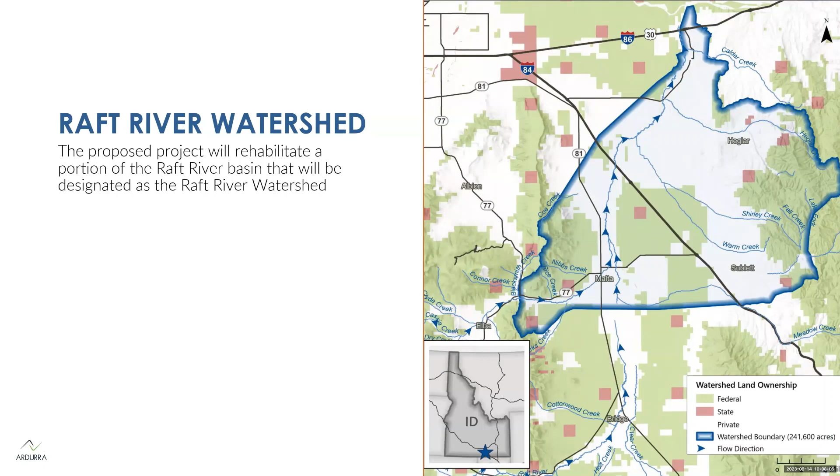It is approximately 242,000 acres. It's developed by combining different hydrologic units as part of the NRCS process. The reason why the project was selected through the USDA NRCS PL 83-566 project is because it is comprehensive. It's addressing flooding, water quality, and declining groundwater levels within the basin.

I've highlighted here the Raft River tributary basin and its relationship to the Eastern Snake Plain Aquifer in the picture to the right.

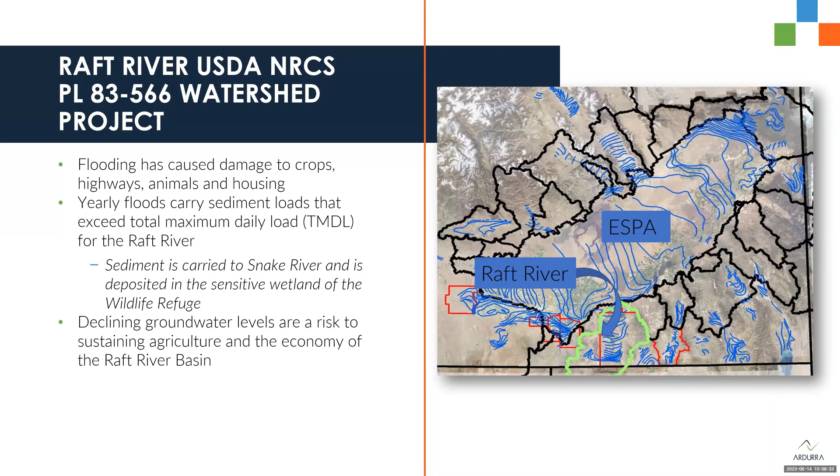Overall, the Raft River Watershed Project would provide flood protection for the Raft River Basin. It provides recharge to a designated critical groundwater area aquifer. It also provides a sustainable source of irrigation for agricultural producers and improves water quality in the Raft River before it flows into the Snake River.

The picture to the right shows the proposed project locations from the environmental assessment, which is being completed by J-U-B Engineers. The pipeline route is the pink line coming up the basin. Bank stabilization is in red, and flood detention basins are also marked on the map. Overall, it's a comprehensive watershed restoration project that addresses many different aspects affecting the Raft River Basin.

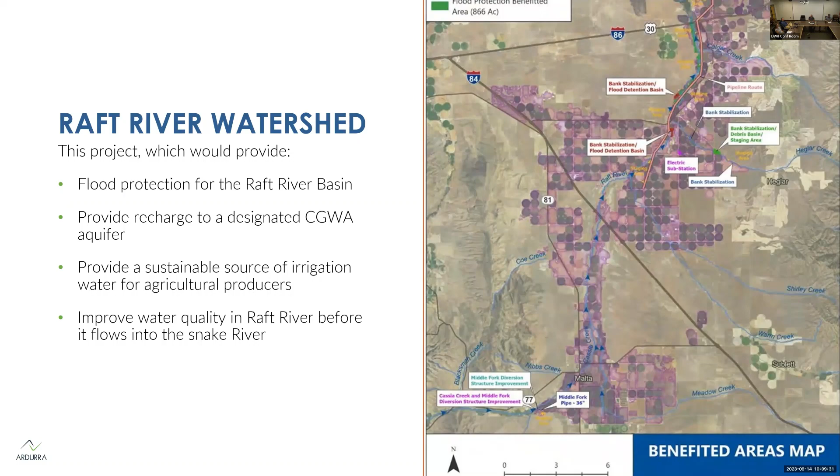A little more detailed information about the project: it would install a pump station and pipeline from the Snake River to the Raft River Basin to deliver private water right permit for recharge. It also develops flood detention and recharge ponds adjacent to the pipeline and Raft River to remove sediment and pollutants and reduce flood flows, but also provide for recharge from the Snake River.

There are bank restoration projects along the tributaries of the Raft River, including Hegler Creek, because they are very high sediment producing rivers. And then the pipeline will enable soft conversion of groundwater acres to surface water for irrigation.

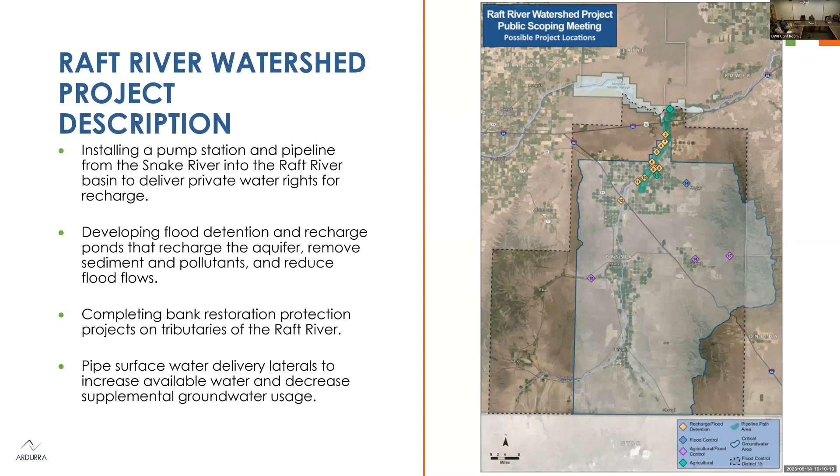The Raft River Flood District has made this project a priority because of recent flooding in 2017. I think we all remember when the water overtopped the freeway, preventing travel from Burley to Pocatello without detouring through Utah. That flood was extensive and caused loss of both crops and livestock.

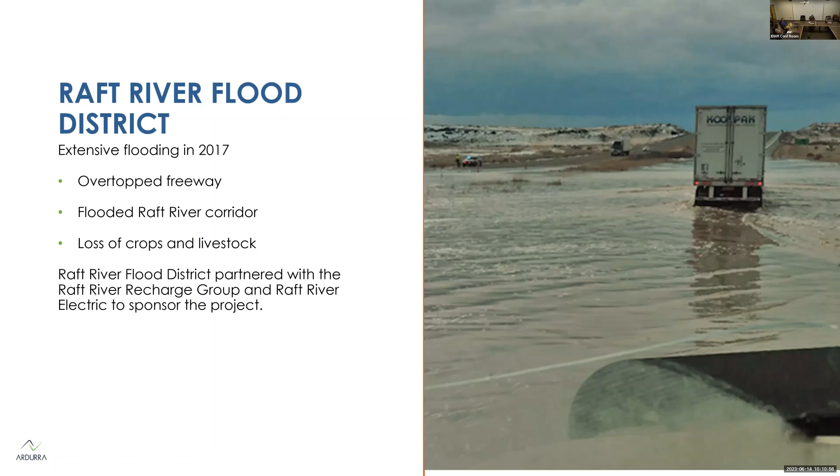As a result of that flood, the Raft River Flood District partnered with the Raft River Recharge Group and Raft River Electric to sponsor the project for funding through the USDA NRCS program.

Raft River Electric is a partner in the project because the continued groundwater declines necessitate more power each year to serve groundwater pumpers in the area. Their part of the project is a substation upgrade that will provide the necessary power for the pump station.

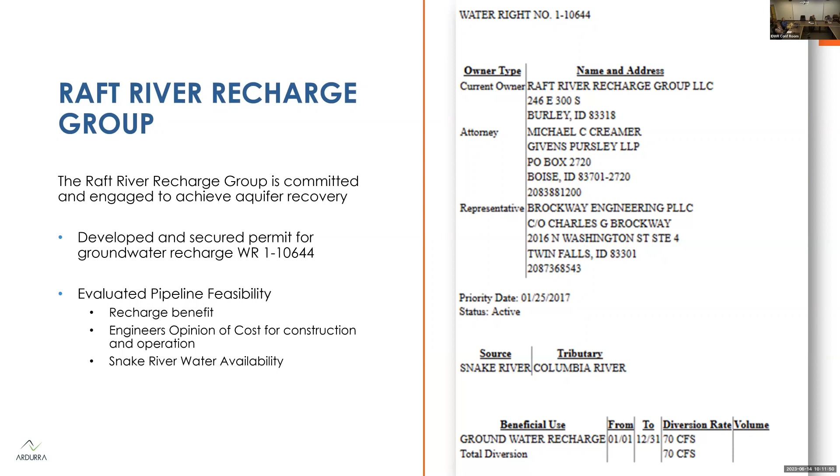The Raft River Recharge Group is really the driving force behind this project. They are cohesive, they're committed, they have been very proactive in their efforts for funding and development of this groundwater recharge permit. Overall, they're the leaders of the group and have been key to getting this project moving forward.

The Raft River Groundwater District is also an essential partner, although they're not partners within the watershed rehabilitation project. But Ryan Moss is also the chairman of the Groundwater District, and they recognize that the pipeline project will be critical to sustain irrigation in the valley.

They work with well water consultants and do continued analysis to evaluate the impacts of current recharge projects, which they have tested quite a few recharge facilities adjacent to the Raft River already and use them yearly, and also track groundwater usage in the valley for the basin.

Ryan, do you have anything to add?

I would just like to say that, as chairman of the groundwater district, we've looked at all options to try to manage our aquifer and make it come back into stability. And there's limited resources inside the basin, so we've looked to outside the basin to try to bring some water in to help with this effort that we're moving forward with, and this pipeline is a big factor in that.

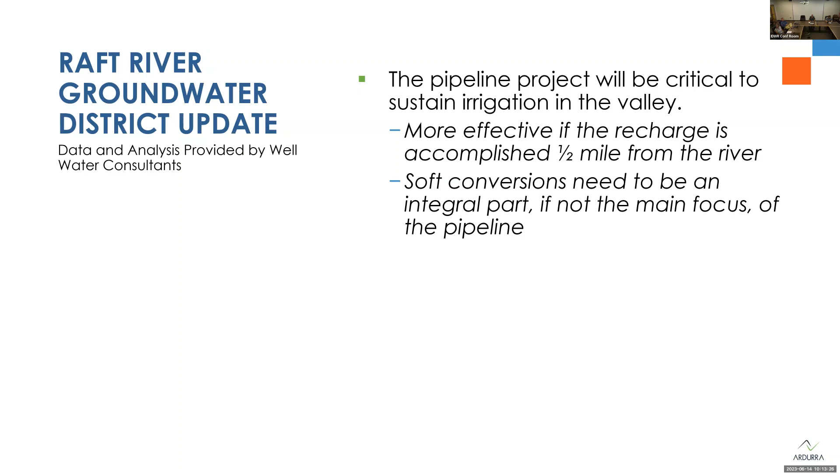All right, well, thank you for that, Ryan. So now I'll talk more specifically about the Raft River Basin and why this project is so critical.

The Raft River Basin is a really productive agricultural region and has an extensive dairy industry and agricultural industry within the valley. The population is pretty small, but that's also what makes it such a great resource, because it's highly productive and has lots of land for agriculture.

So first I'll start with the Raft River. The Raft River was previously a perennial stream before development in the Raft River occurred. The Raft River was first used for irrigation as a surface water source for a small amount of acres in the Raft River. Over time, as groundwater levels have declined, the river has become intermittent and subterranean in the northern part of the basin.

And because it is intermittent, the vegetation and riparian habitat along the Raft River corridor has been eliminated, which creates a condition where when the Raft River does flow, it becomes a very high sediment load carrying river, which then pollutes the mouth of the Raft River, or the confluence of the Raft River with the Snake River at Lake Walcott.

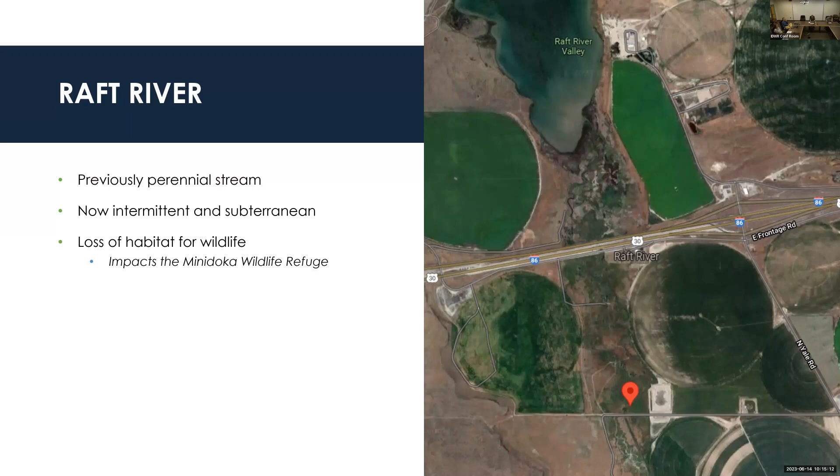So the Raft River Aquifer is a larger tributary to the Eastern Snake Plain Aquifer. It was designated as a critical groundwater area in 1963. The original investigation on groundwater conditions as of 1966 was published by Walker et al.

In 1970. And recently, the Idaho Water Resources Board made the area a priority, and the Department of Water Resources and USGS are part of a larger groundwater modeling effort to evaluate the current groundwater conditions for Raft River, including a hydrologic characterization, which is underway. This is essential work. The hydrologic characterization is the first step in groundwater modeling efforts and will be really important to all stakeholders in the Raft River Basin and the understanding of the interaction between the Raft River and the Eastern Snake Plain Aquifer.

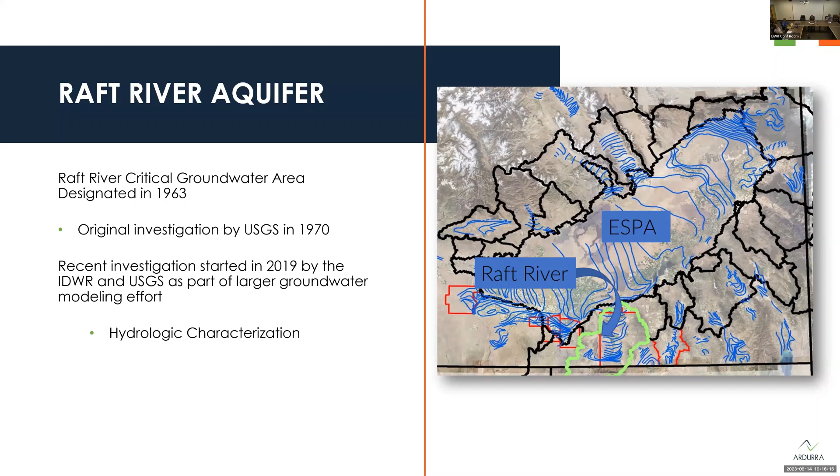So this is a picture showing the boundary of the Raft River hydrologic basin. That's in green. The red line is the critical groundwater area for the Raft River area. We can see that the two boundaries do not match, which means that water rights are administered differently within that boundary, even though the larger boundary is what is determining water availability and recharge for the Raft River Aquifer. Those areas were removed from the critical groundwater area through petitions in 1966, 1970, and 1977, respectively.

Another key element of the critical groundwater area is that additional development was not allowed to occur past the designation in 1963. So as farmers became more efficient with their water application and converted to sprinkler systems, they developed what were called expansion acres, which were designated by the legislature. Those expansion acres had special conditions that restricted their existence and required that annual withdrawals within the aquifer must equal annual recharge in order for the expansion acres to be viable.

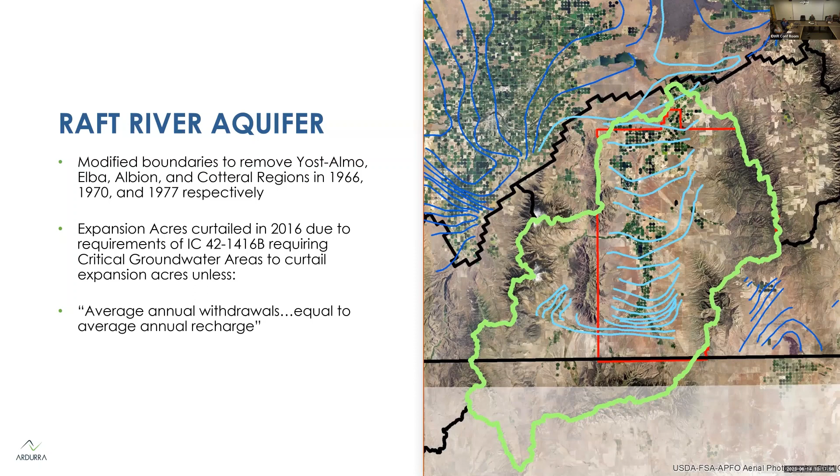So in 2016, that was not demonstrated, and those acres were curtailed between 2016 and 2019 in the basin. The critical groundwater area expansion acres were curtailed, and that was a significant impact to the region. It also is very restrictive. It does not allow for mitigation, and it doesn't take into account any efficiency improvements or cropping practices that the farmers may have implemented.

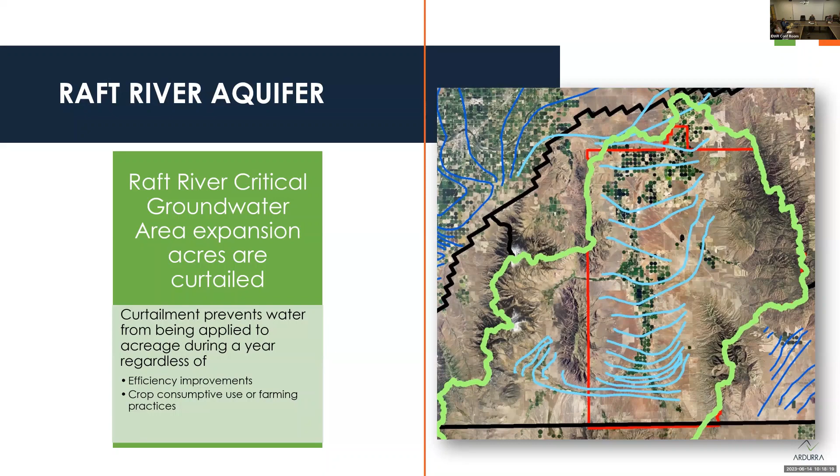We all understand that curtailment is a huge economic impact to the region. Approximately 7,800 acres of water rights were curtailed over a 3-year period. And the overall impact is that it reduced the value of that land to 10% of its previous value.

The Raft River Aquifer has a very dual element to it. The northern basin has seen more significant groundwater declines. It's also the more productive area of the aquifer and deeper. The southern basin has less significant declines. The aquifer recharges more readily because it's closer to the water supply in those areas.

The total aquifer deficit is unknown at this point, although the current hydrologic characterization will help address that. The last estimate was 103,000 acre feet, and that was estimated in 1966. And the majority of that value was because of underflow from the Raft River into the Eastern Snake Plain Aquifer that was considered lost to the basin.

However, in that 1970 report, it was noted that when groundwater levels declined 150 feet or more along Township Range 11 South, it would be expected that the groundwater would be salvaged from the outflow. And I don't know if you can see my cursor, but this 11 South line is right here along this boundary. And at that boundary, those groundwater levels have exceeded 150 feet of decline. And so it is anticipated that the current research will be finding that a portion of the groundwater outflow is being salvaged for groundwater use within the basin.

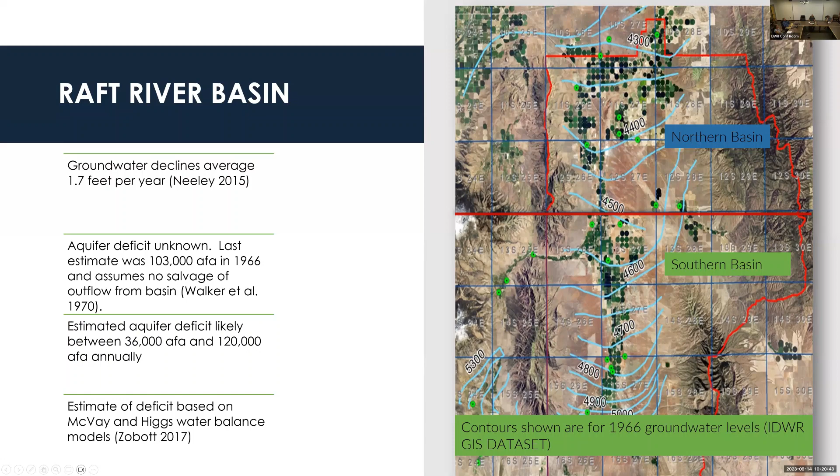So just a little more on the aquifer difference between the northern and southern portion of the basin. So the southern portion of the basin is the gray line, and we can see that the declines are much lower. It's actually a little bit less than 1 foot a year on average, whereas the northern basin has a steeper decline and is consistently losing approximately 2.3 feet per year.

So the impacts of groundwater declines are more severe for the northern basin, and that's why the Raft River Recharge Group has been so proactive, because they are the bottom of the basin and experience amplification of all the impacts upstream on their operations and groundwater pumping.

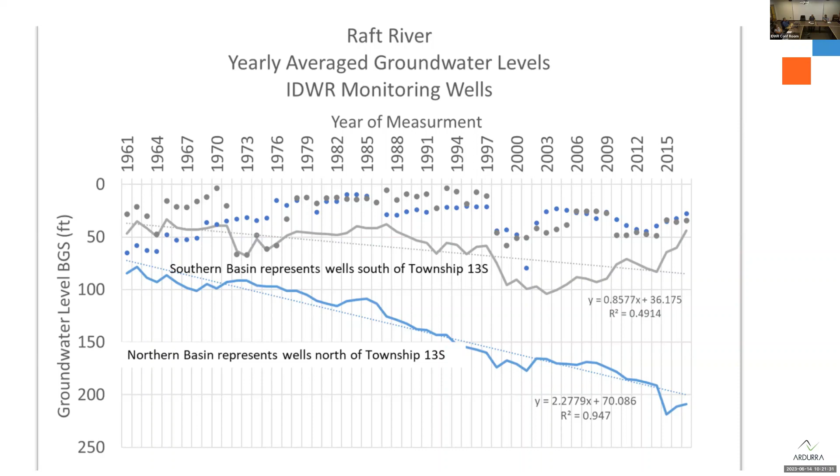Groundwater recharge was evaluated within the Raft River feasibility study completed by Brockway in 2015, and it is anticipated that groundwater recharge will significantly benefit the northern portion of the basin. Those yellow circles are approximately the recharge locations modeled with the simplified groundwater model at the time of the feasibility study, and the contours show how the water would mound within that area as a result of recharge at those locations.

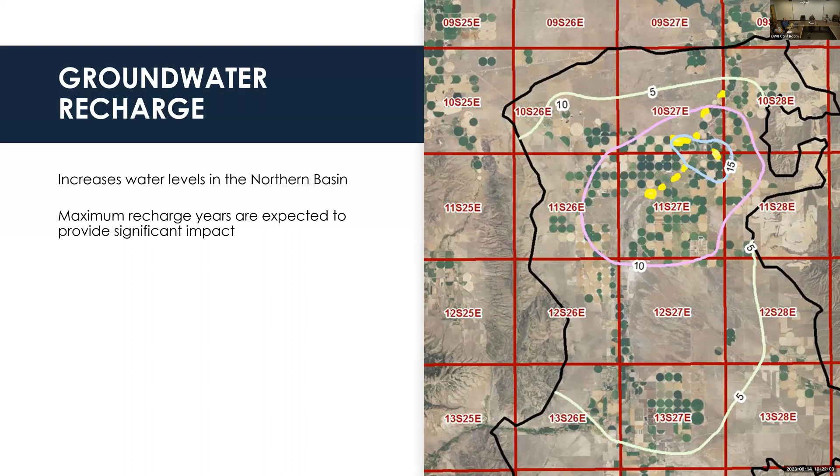Overall, the Raft River Recharge Group and partners proposed to build a pipeline to divert water from the Snake River to reduce groundwater declines, improve access, provide opportunity for soft conversion, and prevent future curtailment.

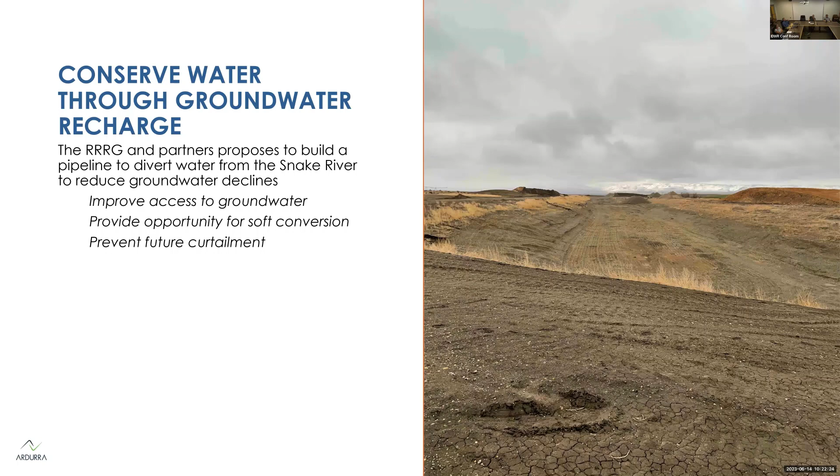In summary, the Raft River Watershed Plan includes projects to construct a pump station and suction lines at the Snake River that connect with a 13-mile long pipeline extending north to south to deliver approximately 100 CFS of water, including 70 CFS of recharge water, with opportunity to provide soft conversion water on top of that capacity. There would also be flood control and recharge basins along the Raft River floodplain to provide 620 acre-feet of detention and recharge within those basins.

The plan also includes constructing debris basins along Heglar Creek to control for flood and sediment, constructing a substation to support the project, and improving existing diversions to flood channels along Raft River, Cassia Creek, and the Middle Fork of Cassia Creek. Finally, there would be bank stabilization and restoration along Heglar Creek to reduce sediment load during flood events.

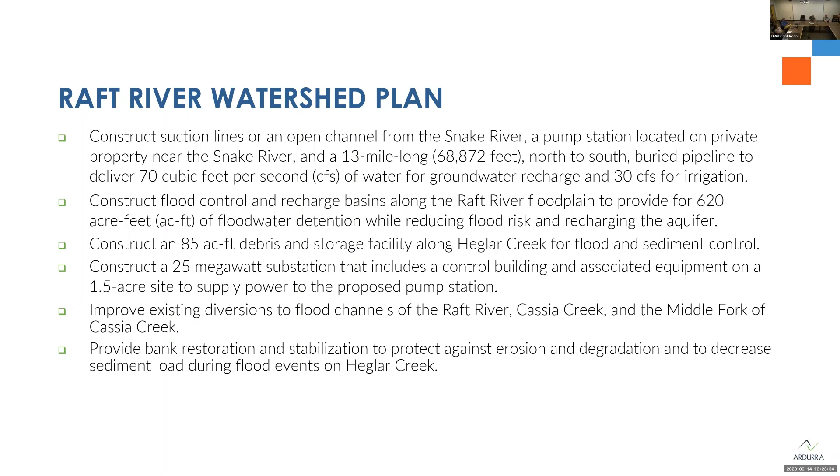The recharge locations are within the water right permit and would be within the locations shown in blue on the map, so there's a place of use for the recharge. Recharge would then be rotated around the northern portion of the basin to evenly distribute the benefits for the area.

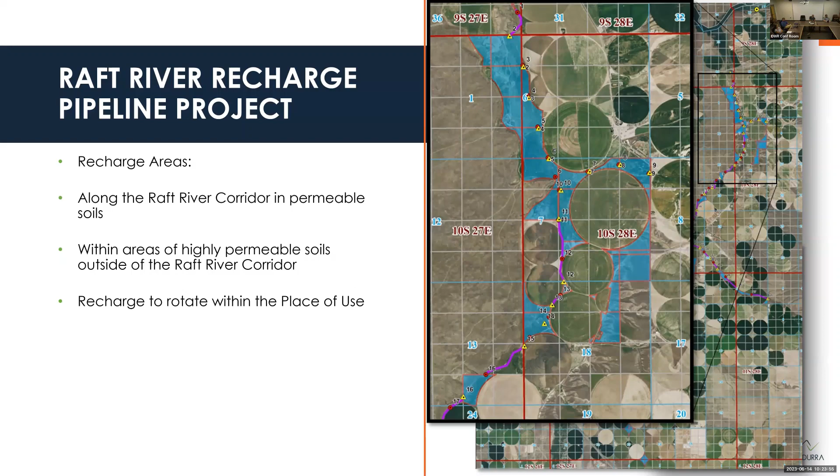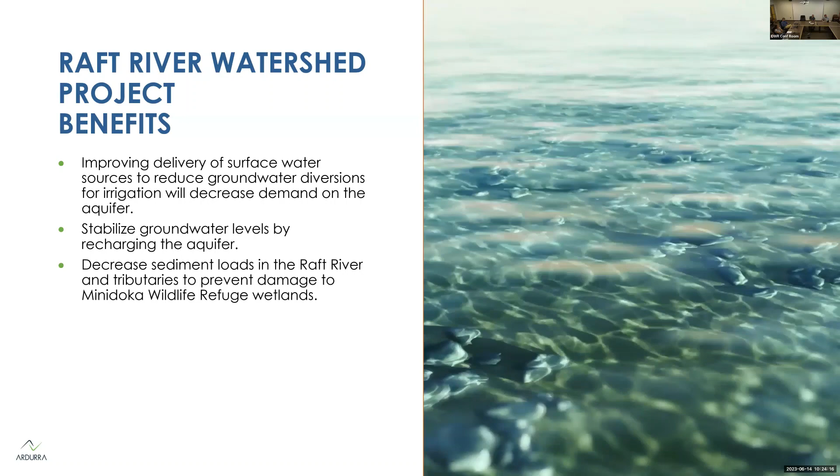So in summary, the benefits of the project are to provide for delivery of surface water to reduce groundwater diversions, stabilize groundwater levels by recharging the aquifer directly, and improve water quality by decreasing sediment loads in the Raft River and tributaries to prevent damage to the Minidoka Wildlife Refuge.

So I just wanted to go through the funding that the project has secured to date.

The main source of funding for the project is through a very unique program called the USDA NRCS Watershed Protection and Flood Prevention Program, PL 83-566. There are three phases to this program: the first phase is environmental, the second phase is design, and the third phase is construction.

The match for the first two phases is 100%, so the NRCS pays for all of the environmental assessment and the design of the project. An environmental assessment is required because of the extent of the project and because it does not fall under existing programmatic exemptions that the NRCS has.

The design can start once the NRCS National Office has provided programmatic approval of the project, which we expect to happen within the next 3 to 4 months. Construction can then start once design has been approved at the 90% level by NRCS.

The program will fund up to $25 million in construction for the project. At that level, it would require $6.25 million in match for the agricultural projects, or 25%. The project is sponsored by the Raft River Flood District, and co-sponsored by the Raft River Recharge Group and Raft River Electric.

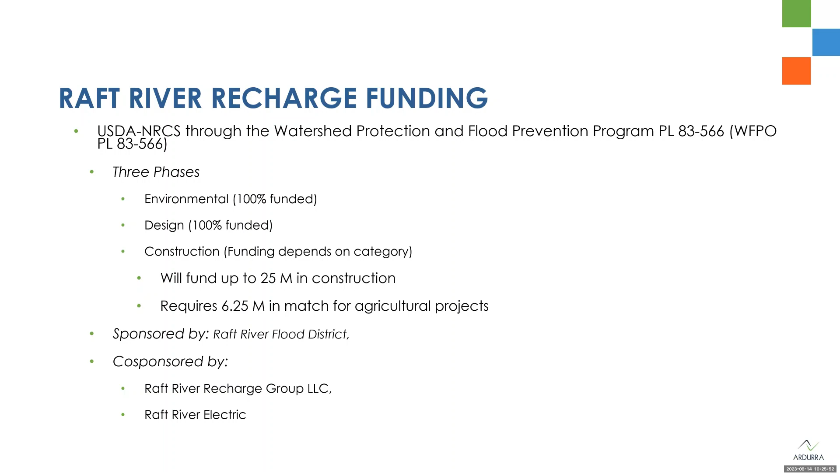The Raft River Recharge Group also pursued a loan through the Idaho Water Resources Board Water Projects Loan Program. They requested a 20-year repayment schedule and were provided an interest rate of 4.75%. The loan of $14.1 million was approved with security to be provided by developing a Raft River Irrigation District entity that would hold and repay the loan.

So overall, the funding for the project: most of it is provided by the NRCS Phase 3 construction phase of the PL 83-566 program. The Phase 2 design was estimated to be about $3.25 million.

The Raft River Recharge Group provides about 13% of the project in cash. The Raft River Electric will provide about 3% in cash match for the substation. The Idaho Water Resources Board loan, which will be through the Raft River Irrigation District, will be about 29% of the project.

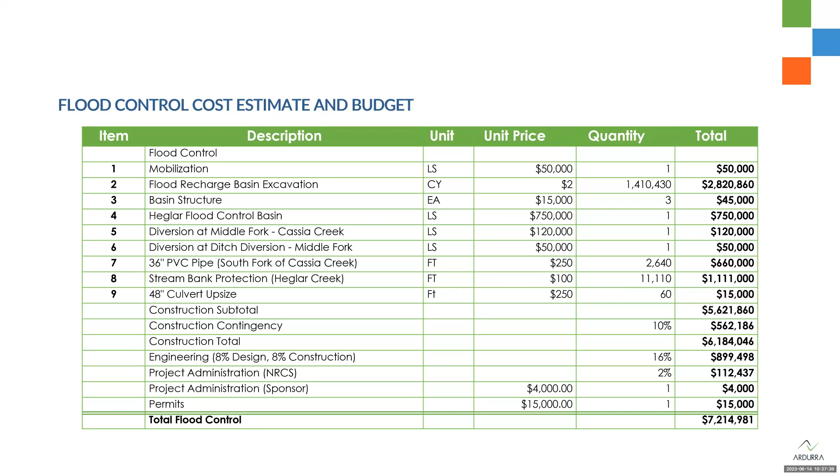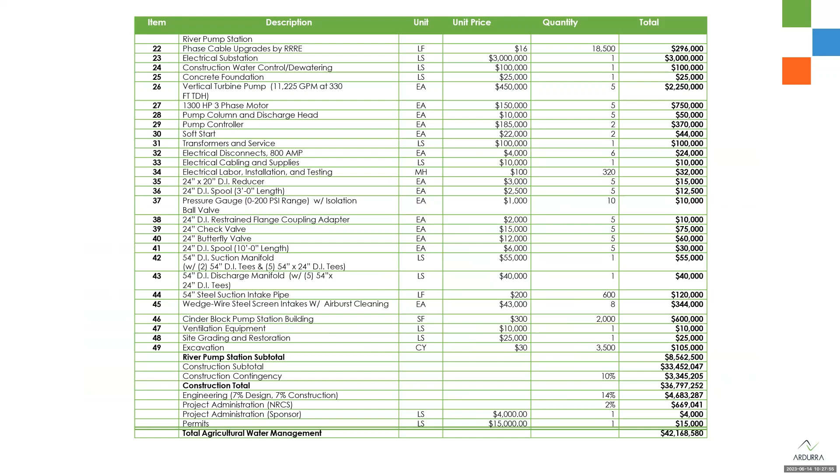The flood control projects and water quality projects are about $7.2 million of the project. The pipeline is about $25 million. The total agricultural portion with the pump station is expected to be $42 million. So overall, the project is about $49 million and some change to complete.

I just wanted to give you a quick update on the Raft River Irrigation District formation. The Raft River Recharge Group hired legal counsel to represent the district and form it. They prepared and submitted the petition to form the district in Cassia County, and there will be a special election in August for the district formation.

The Raft River Irrigation District formation was a little complicated because some members of the recharge group were outside of the district boundaries. So we developed 7 districts that will be represented by each member in the group, and the total number of acres were limited to 3,000 so that the directors could live outside of the district.

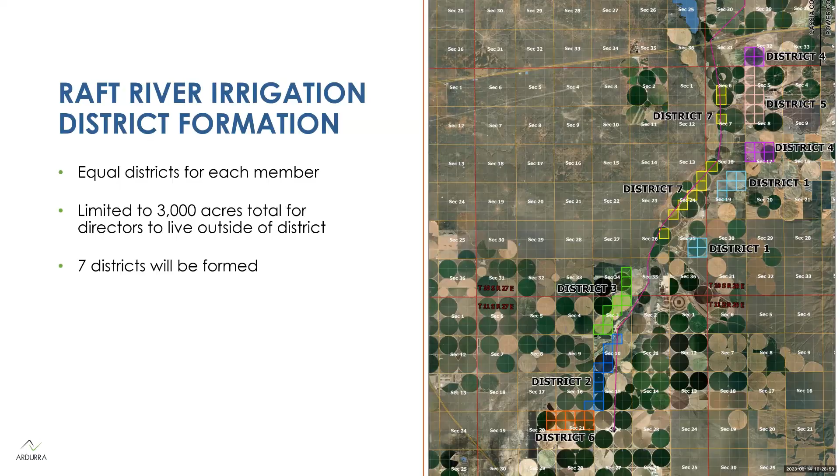Finally, I prepared a project status update. We've talked about this previously, but there's a water right permit for groundwater recharge from the Snake River held by the Raft River Recharge Group. There's been a preliminary environmental review with Bureau of Reclamation and U.S. Fish and Wildlife Service, who are cooperating agencies on the watershed plan EA that will be prepared by NRCS.

The project was selected for funding through the NRCS PL 83-566 watershed program. The loan has been earmarked for the Raft River Irrigation District. They are working with USDA NRCS, Bureau of Reclamation, and U.S. Fish and Wildlife Service to complete the environmental assessment. The draft preliminary plan EA was submitted to the Idaho NRCS state office and is pending submittal to the National Watershed Management Center, which is expected within just a few days.

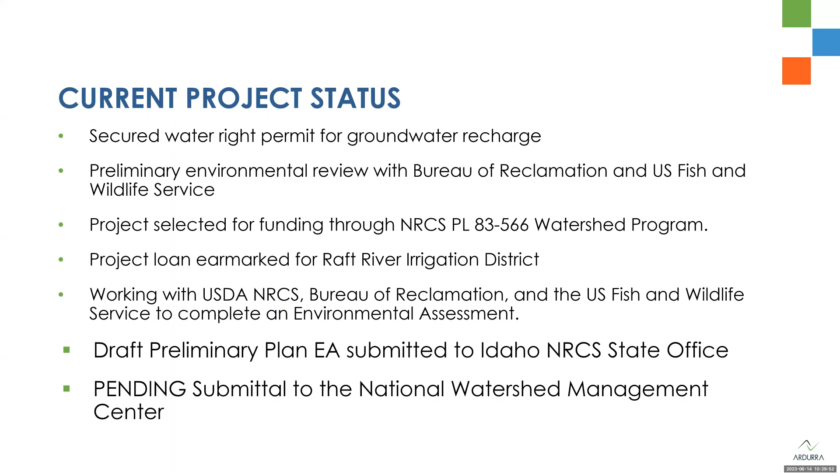In 2024, the design phase can start with programmatic approval of the draft watershed plan environmental assessment, anticipated in November. This is much later than we originally anticipated, and those delays were unforeseen, related to the watershed plan EA approval process at the state and national level. Rules have changed since the last submittal, so there were some delays that weren't anticipated.

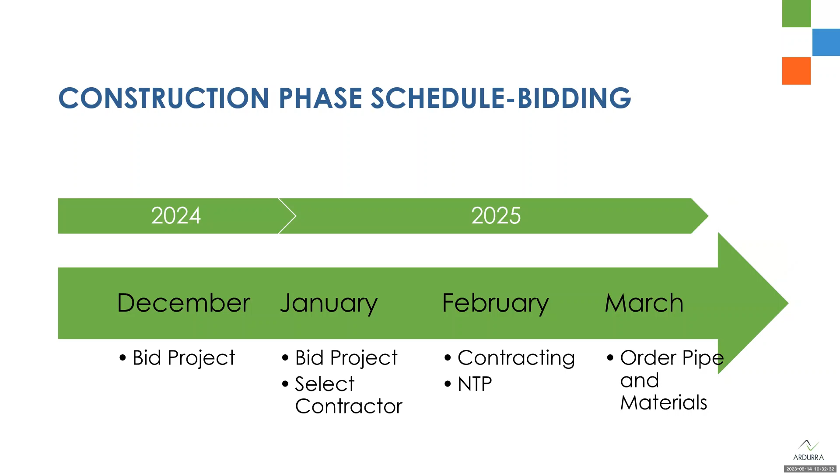The design schedule for the project is very tight. It's expected to be a 1-year design schedule from design start until bid, which would be very tight for a project of this size, but we think the Raft River Recharge Group will be able to meet that schedule, anticipating bidding in December of 2024. The bidding schedule would follow the design schedule, with bidding completed by February of 2025, for construction in 2025 and then going into 2026 during the non-irrigation season.

So that's a very quick overview of the schedule. I've got just three minutes left.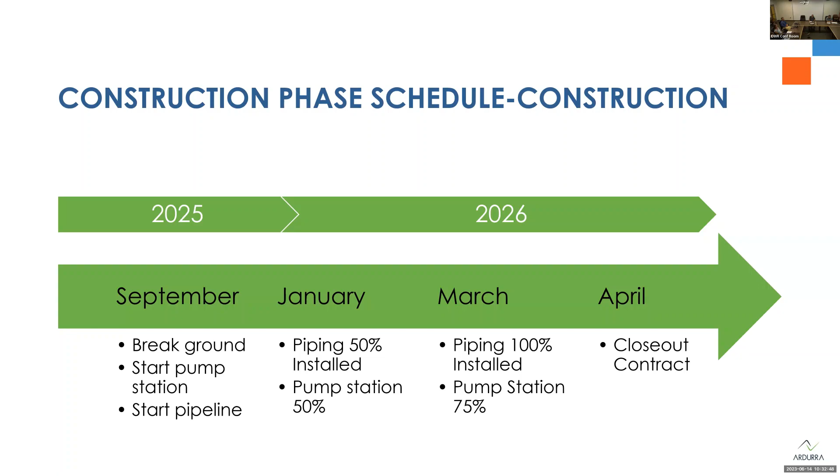Overall, the project is on the regional water sustainability list. The Raft River Recharge Group and partners would like to see the project maintained on that list, and it would be helpful to see it upgraded as a priority by the Idaho Water Resources Board. As the project moves along, the purpose and need will be demonstrated to the Board. We would like to see the project reviewed as ARPA fundable by the Department of Water Resources. It is a tributary aquifer to the Eastern Snake Plain Aquifer, and that information will be available pending groundwater hydrologic framework and modeling. The group and partners would like to pursue grant funding for the entire project.

For a portion of the project through the Idaho Water Resources Board, they had previously pursued the project as aging infrastructure but were disqualified as not qualifying. They are currently on the list for regional water sustainability, and if designated as ARPA fundable, a portion of the project may be fundable as groundwater recharge.

So going back to the project funding overview, the portion of the project that the group is looking for support on is related to the loan elements that they've earmarked, and that's roughly 29% of the project.

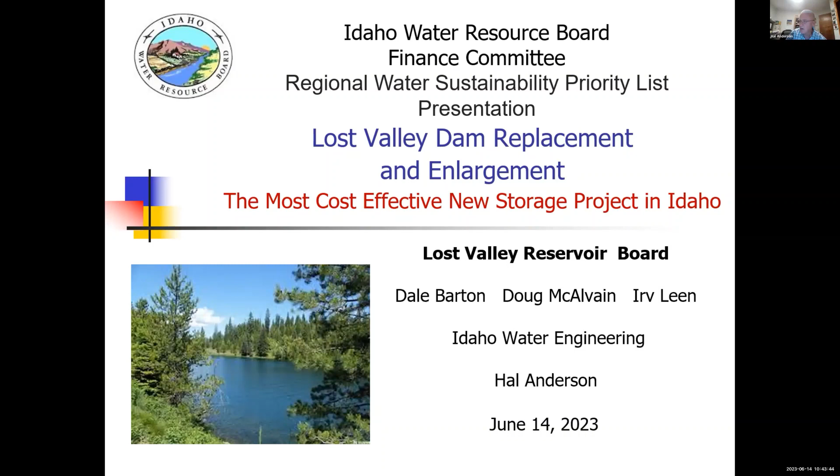Absolutely. Okay, thank you. Well, we've been working on this for a long time, and we're pretty excited about the possibility of getting this reservoir built, and we're looking to the future down the road of having a sustainable water supply for the Weiser Basin.

So why is it important that this project go forward? First and foremost, it's a 100-year-old dam, and it needs to be replaced. It needs to be replaced not only for public safety issues and flooding issues, but also so there's a sustainable water supply for the future. It's long been a supported priority for the Water Board. It's the lowest cost new storage project in Idaho that we know of. The project is fully supported by local water users, legislators, county commissioners, and the Farm Bureau.

So the current sponsor is a private reservoir company, Lost Valley Reservoir Company. It's a 3-person board. Dale and Irv are here. Doug McAlvain is the 3rd member. There's going to be a 4th seat added. They're currently in the process of updating their bylaws. They have an attorney working with them on that, and that's to incorporate the Class D shares. Class D shares will be the new storage proposed for this project.

Currently, the reservoir is 10,000 acre feet, and the enlargement would make the total capacity 30,000 acre feet. The reservoir company has been around since 1925, and the Lost Valley Reservoir Company owns some of the land under the reservoir site, and the remainder of the land is U.S. Forest Service.

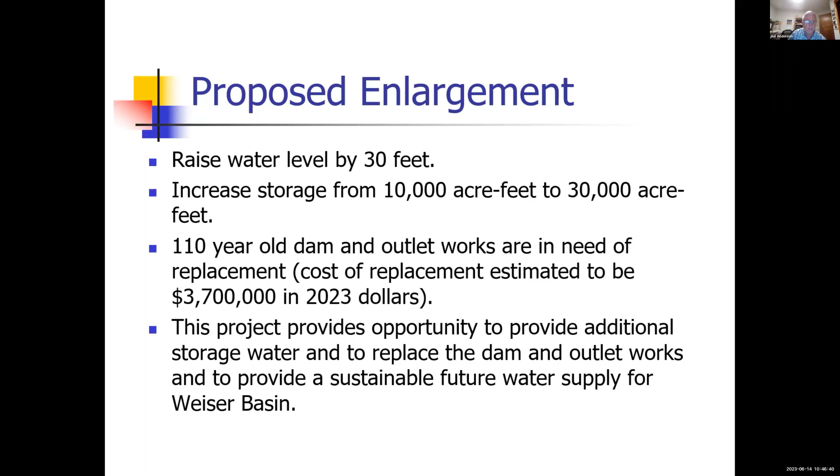So like I mentioned before, if this project goes forward, we're talking about raising the water level by 30 feet, increasing storage from 10,000 to 30,000 acre feet. An estimated cost in 2023 dollars of just replacing the old dam at 10,000 acre feet is 3.7 million. But this project really provides the opportunity for additional storage water and replace the dam and outlet works.

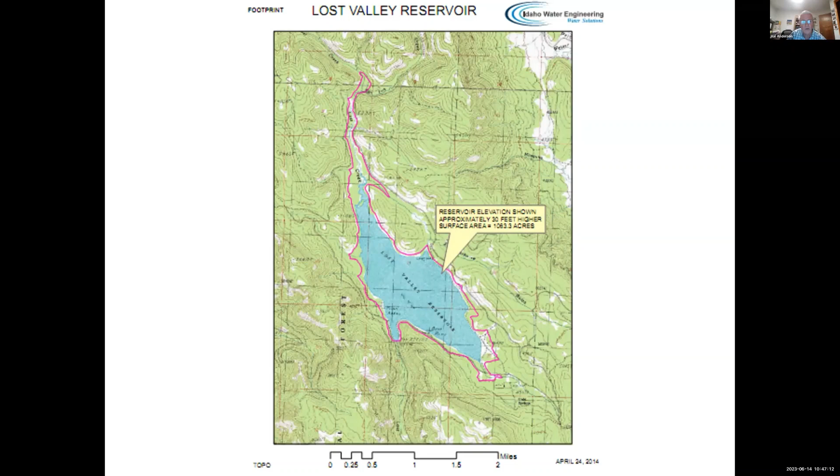This would provide a sustainable future water supply in the Weiser Basin. This shows the footprint of the existing dam in blue, and if the enlargement goes forward, the area in red will be inundated by the new reservoir. You can see it's a pretty steep area. The area where you're losing the most additional land around the existing reservoir site is in the upper portion along the inflow creek.

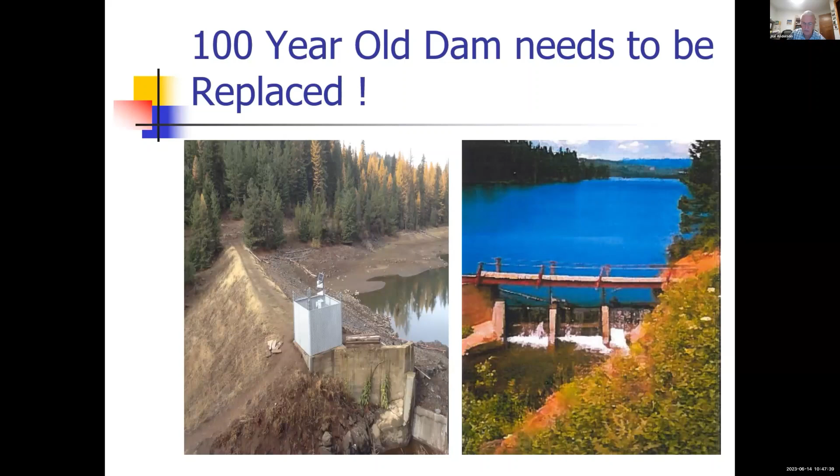This is a picture of what the dam looks like. The water level is down - this is at the end of the irrigation season. But you can see that the concrete and the dam itself is really ready to be replaced.

The Lost Valley Reservoir Company signed an agreement with Idaho Water Engineering in 2013. We made presentations in '14 before the Water Board. One of the main issues that's held up this entire project has been the northern Idaho ground squirrel. It's a threatened species, and it lives near and around the existing reservoir.

In 2020, thanks to the board's action on this, the board signed a subordination resolution to subordinate their water right at Galloway as we move forward to completion of this project.

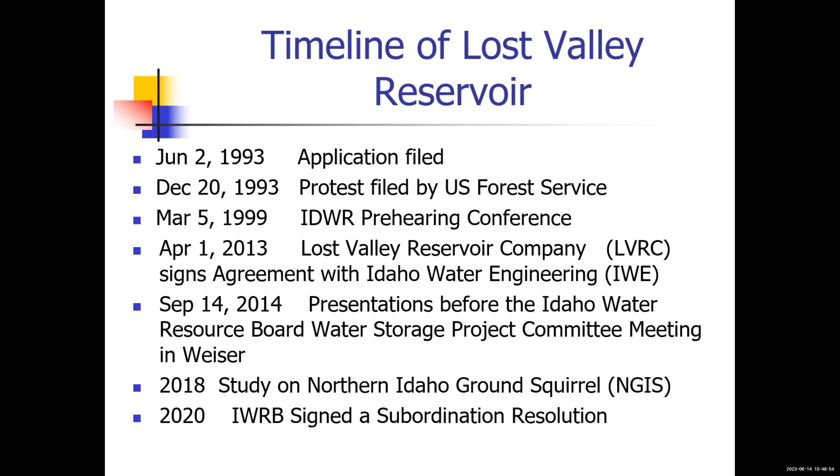Beneficial summer flows, carryover storage was potential in the Lost Valley Reservoir. It could work in tandem with the Galloway project, even if Galloway is built. It's low-cost storage, and without this subordination, really, the Lost Valley Reservoir expansion could not go forward. Thankfully, the board agreed to that subordination and signed the subordination agreement in July of 2020.

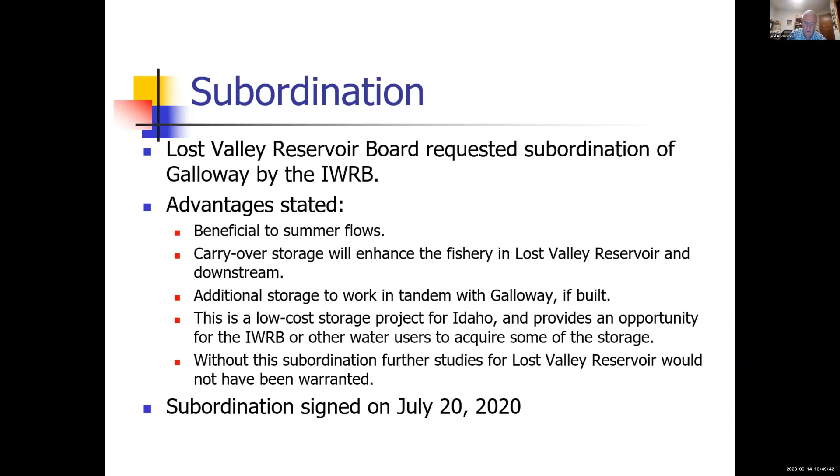The support for this project has been quite robust. It's included certainly in the state water plan specifically, and the state water plan identifies Lost Valley as a reservoir site with high potential for development. House Joint Memorial number 8, approved in 2008, included specific mention of the Lost Valley dam site.

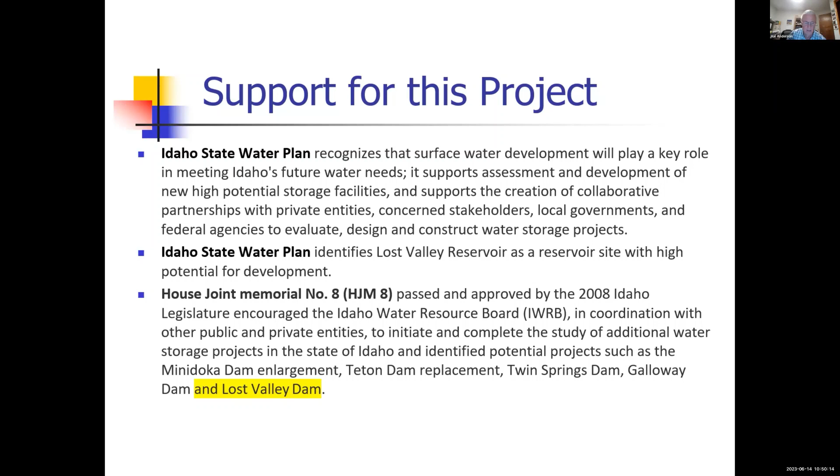So far, the board has been very supportive of the project. They funded the initial feasibility work back in '92 that led to the application. In 2017, they provided funding for the Lost Valley Creek and reservoir measuring devices in the amount of $16,000. And in 2019, the board funded the Northern Idaho Ground Squirrel Study in the amount of $30,000. So the board and the reservoir company are very thankful to the board for their support to date.

We also have letters of support from the Adams County Commissioners, the Washington County Commissioners, and the Snake River Development Alliance, which is the economic development entity for Washington County. The Farm Bureau Policy 16 specifically supports this project, mentioning the raising of Lost Valley as one of its priorities that they support.

So let's talk a little bit about the dollars here. In 1992, it was estimated to be about $2 to $2.4 million to enlarge the dam. In 2020, that number was up to $9 million. We're now looking currently, and this is just for construction costs, not the pre-construction costs, at 13.5 million in 2026.

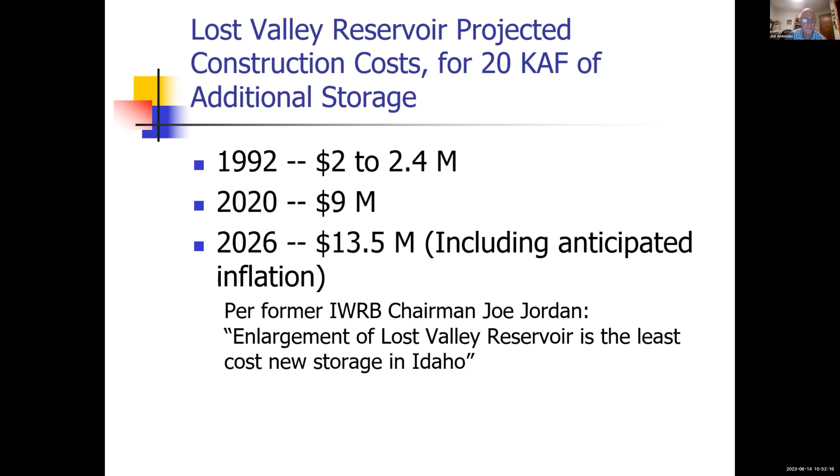So this is a spreadsheet that shows the costs associated with the dam construction, both the pre-construction and estimated total construction cost. The construction mitigation cost is about 13.5 million, and pre-construction cost is in the neighborhood of 1.12 million. By the way, the construction cost does include $1.5 million for mitigation. We assume there's going to be some mitigation requirements associated with the ground squirrel and possibly for wetland loss.

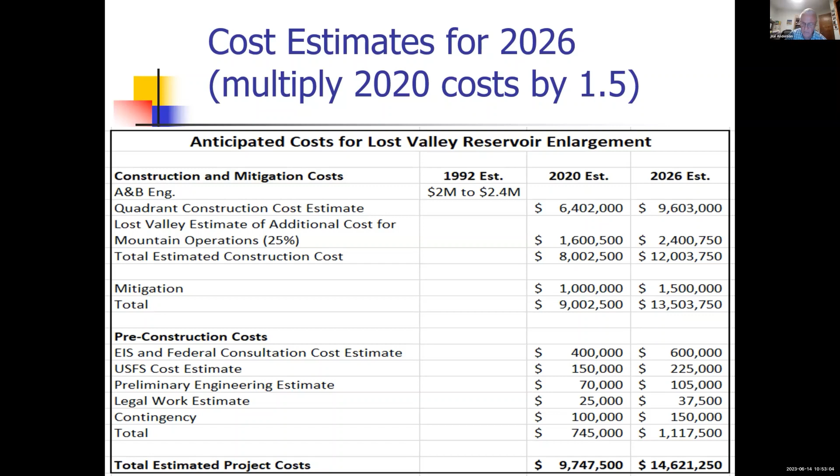So the cost of this per shareholder - there's 16,000 shares available in the expansion. The construction funds needed of the 13,500,000 results in a construction cost of around $840 an acre foot, which is very reasonable cost for new storage these days. And it is assumed that the board will typically provide the bonding and the funds for a long-term loan.

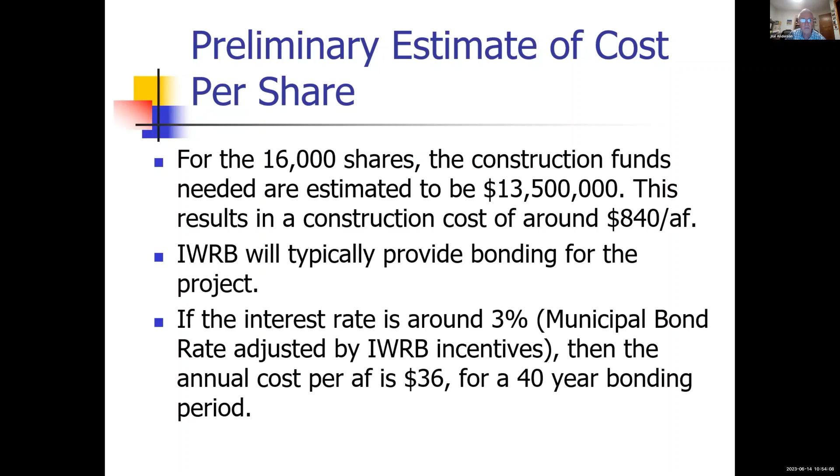The interest rate's at 3%, it may be more. But assuming a 3% loan from the board for the construction cost, the annual cost would be $36 an acre foot if we had a 40-year term on the repayment period. And these are just estimated costs.

So the funding plan at this date: currently there are 3 existing share groups, classes A, B, and C shares, that total around 10,000 acre feet. The class D shares for the enlargement would be 16,000 class D shares, and that would be created with the enlargement. So each share is currently for an acre foot.

The annual fill is not guaranteed, as we all know, but the average basin yield is around 26,000 acre feet, or possibly a little more. But in the year 2021, which was a relatively dry year, we had 20,000 acre feet available to fill the reservoir. That would have been the initial A, B, and C shares plus 10,000 acre feet of the class D shares.

So the offerings to date for the additional storage were to existing shareholders first - they were given the first crack at it. Other water users in the Weiser Basin were also provided an opportunity, and we've had interest in both of those, and I'll go through those numbers in a little bit more. The board was also offered additional storage if they were interested in it, and then fourthly, there were others that had expressed interest and knew about the project and had requested interest if there was water available.

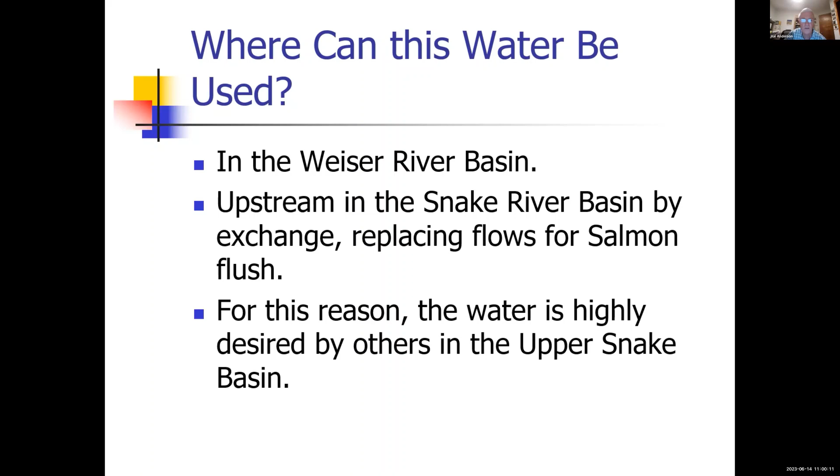So where can the water be used? It can be used certainly in the Weiser Basin, and it can be used upstream in the Snake River Basin by exchange, replacing salmon flow augmentation. That's exactly why the American Falls Aberdeen Groundwater District is interested in acquiring water in the Weiser Basin in exchange for salmon flow augmentation from the Upper Snake. Because of that opportunity, there's been interest by others in acquiring storage in the Lost Valley Reservoir expansion.

What we're looking at now is a schedule: to obtain a $560,000 grant from the Idaho Water Resource Board to move ahead with the NEPA work and final design activities, pre-construction activities. Once we get done with the NEPA work and engineering design, we'll move ahead making financial arrangements with the board for the other $13.5 million in the form of a loan. We'll prepare the final engineering RFP, go out for construction, select the construction company, and construct the project with the idea of storing and delivering water in the spring of 2027.

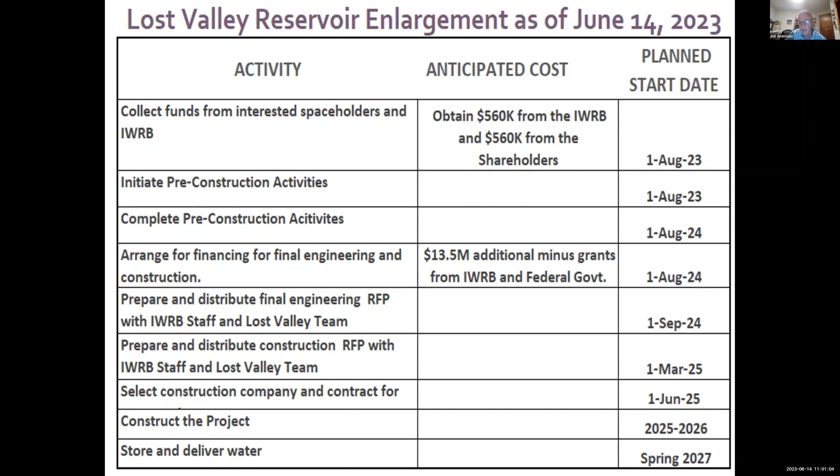So the type of assistance needed by the board at this time - a brief summary: provide matching funds for the next step. If we can get matching funds from the board of $560,000, we will meet with the stockholders who want the additional storage and assess them for the other half of the EIS and pre-engineering work. It's really important for the state, for the water board, to determine if they want to move ahead to acquire the 5,674 acre feet of Class D shares that are available and the 4,000 acre feet of project development shares, or if they would prefer that be offered to other entities. As soon as y'all can make that decision, that would be helpful for us to know.

That's all I have as far as the project goes. Thank you, I'm open for questions, and both Dale and Irv are here to answer any specific questions you might have regarding the Lost Valley Reservoir Company.

Thank you, Hal. Are there any questions? Joanne, Mark Gibbs, I have a question. Okay Mark, go ahead. Thank you. How were those yield figures on the storage - were those numbers calculated before we've been doing cloud seeding, and are we cloud seeding that basin? Could those numbers be boosted by continued or enhanced cloud seeding efforts?

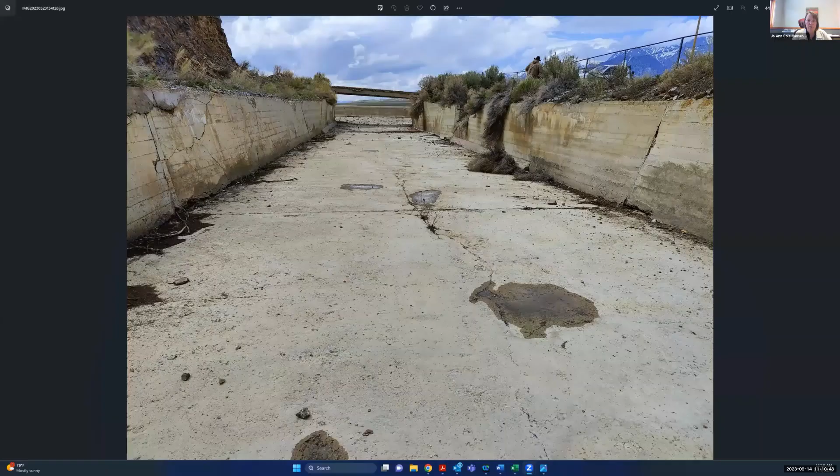We're not seeing the pictures yet. Oh, there we go, okay. There's a picture of the spillway. It's in bad condition, as a lot of irrigation facilities I visit in the state are there by habit. We were there week before last investigating, and there was evidence of uplift in this floor here when the water comes over the spillway. So it needs to be addressed fairly soon. Let's see if I can find another picture here.

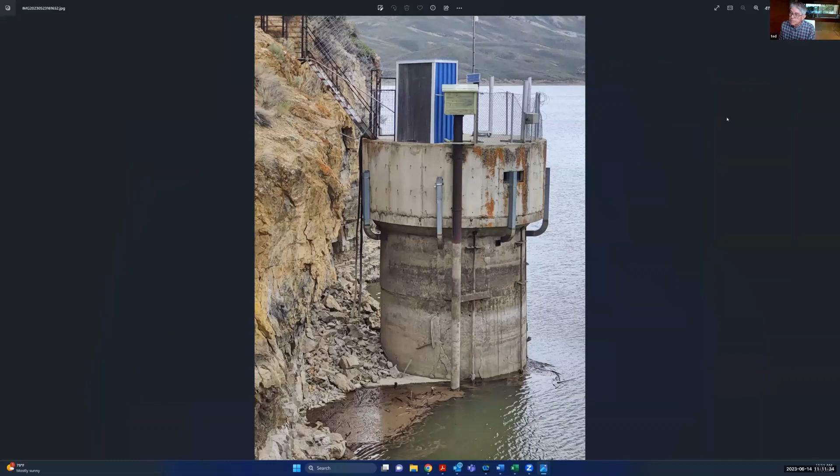And we also have an intake tower here. Surprisingly, we found that intake tower in very good condition, but the gates are in very bad condition in terms of needing to be repaired and upgraded with operators.

We were initially approached by Byron Pearson and members of their board to take a look at putting a hydroelectric plant on the Mackey Dam in order to defray some of the costs of the dam repairs. We looked at that for about 6 months, and our conclusion is the basic economics of a hydroelectric plant on Mackey Dam, coupled with the regulatory requirements the district would take on from the Federal Energy Regulatory Commission, meant we concluded they should not put a hydro on it. It wasn't feasible to do.

So here in the last month, they've retained us to do the engineering work to replace the spillway and to reinforce the control tower and upgrade the gates. And that's what we're beginning to do.

Our current budget, I have it up on the screen, is some $7.3 million. Our goal is to go to work on the spillway in late summer 2024, go to work on the intake tower when they can drain the reservoir, which would be like October 2024, and have all this work done by spring of 2025. And that's all that I know.

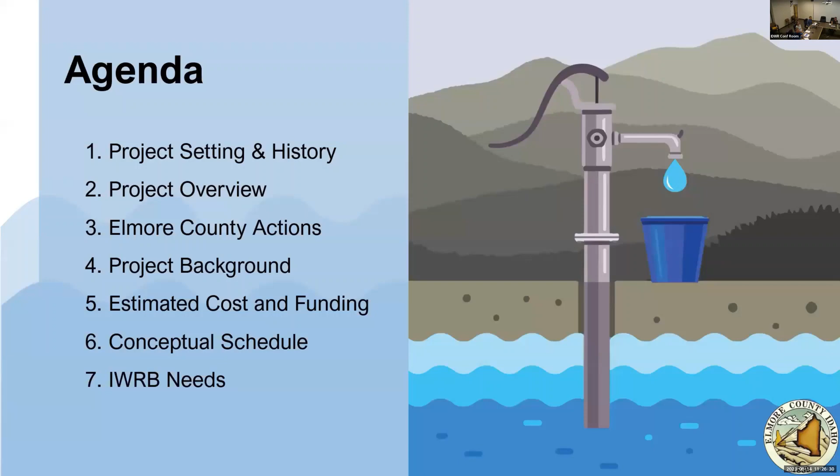We are working on the South Fork of the Boise River Diversion Project, where we're going to bring water from Anderson Dam up into the Little Camas Reservoir and move the water down through the irrigation system with Mountain Home, in conjunction with the Mountain Home Irrigation District. There's approximately 40 miles of canal systems and different reservoirs — Little Camas, Long Tom, and the Mountain Home Reservoir. It's quite an elaborate works, but it works very well and has for quite some time.

So that's kind of an overview of the general setting. A lot of you have seen the location and seen some of the works there. So we're really excited to have that move forward.

One thing we've also done that's important to note is we hired a historian to put together a report on the history of water in Elmore County. I don't have a copy with me today, but I'm sure we can get it emailed out from either Terry or Carrie to your group. It's an extremely detailed report, showing from the very beginning — it starts in 1891 with the history of water being brought into the Elmore County area. Through the report you'll see quite an interesting story unfold from prior to the dams being built, Anderson Dam, and a lot of these large projects you see around the state. Elmore County has been talked about extensively in every one of those projects, starting in 1891.

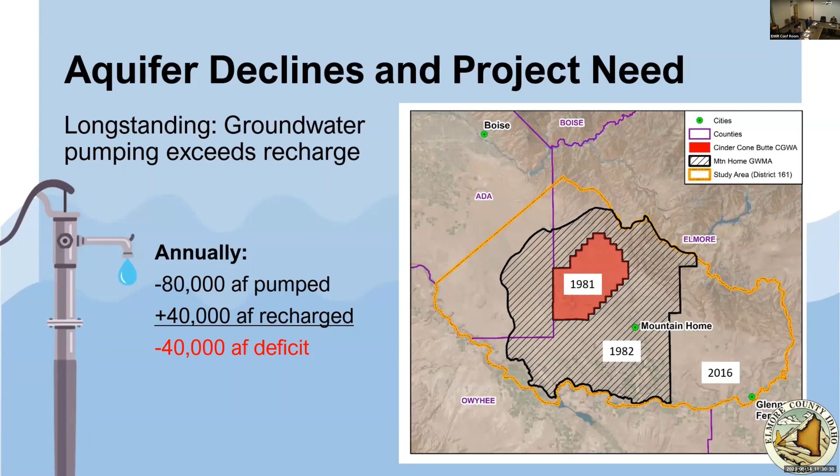Since that time, really, there's been very little groundwater development in the southern portion of Elmore County. As most of you know, the board sponsored or funded a large portion of a study that we did in Elmore County back in 2016, 2017, and we looked at these water level declines and opportunities for bringing water in to help stop these declines.

What we did see was that the declines vary by area. There's been 100 to 200 feet in the Cinder Cone Butte area, 75 to 100 feet south of Mountain Home, and 70 to 90 feet around Mountain Home Air Force Base. But interestingly, there's been no decline north of Mountain Home, where there's been incidental recharge from the Mountain Home Irrigation District with water brought in from the system we're going to talk about today, and also near Mayfield, where there really hasn't been much in the way of groundwater development.

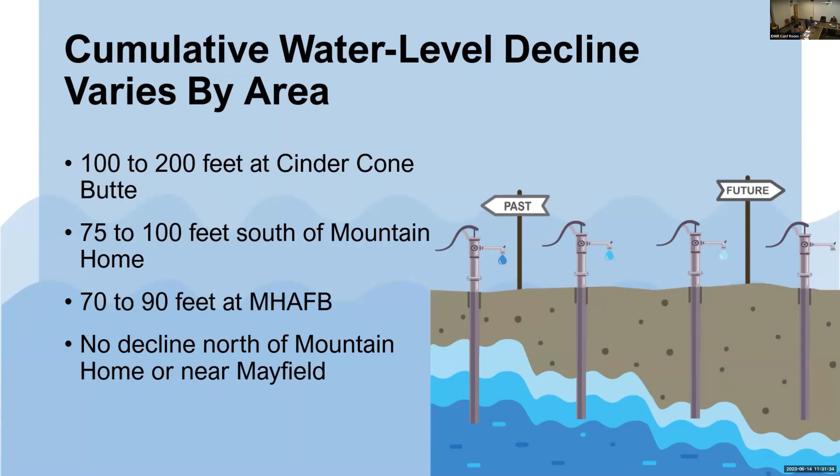So the project we're talking about today, and we're just really here to give you an update on what we're doing, is the South Fork Boise River project. As I mentioned, we had a study in 2017 that was two-thirds funded by the board. Out of that came alternatives for bringing water in, either from the South Fork Boise or from the Snake River.

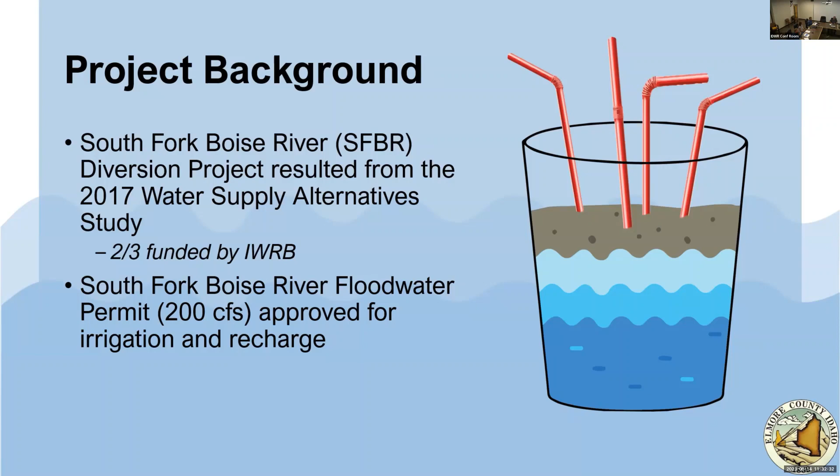The county commissioners have been primarily pursuing the South Fork project. They received approval of a water right permit for 200 CFS back in 2018 or 2019. They still have a pending application for water from the Snake River. They also received approval of a permit for recharge from Canyon Creek at that time.

Specifically on the South Fork Boise River project, what it proposes is to pump water out of Anderson Ranch Reservoir up to Little Camas Reservoir, which is about 800 feet above Anderson. From Little Camas, it would flow through the Mountain Home Irrigation District Canal, about 13 miles until it crosses through the last of, I think, 13 or 15 tunnels. That tunnel takes it into the Canyon Creek drainage, and it flows through the natural drainage of Canyon Creek, Long Tom Creek, Long Tom Reservoir, to the Mountain Home area, where it could be used for supplemental irrigation within the Mountain Home Irrigation District, or for groundwater recharge. Both of those are approved uses under our water right permit.

The Canyon Creek recharge facilities, as Bud mentioned, are currently functioning using natural flow out of the Canyon Creek drainage, but that's a very limited supply, maybe on average 1,000 acre feet or so a year. But we're using them to the full extent that we can, and as Bud says, we appreciate the board's support in getting those facilities constructed and operating.

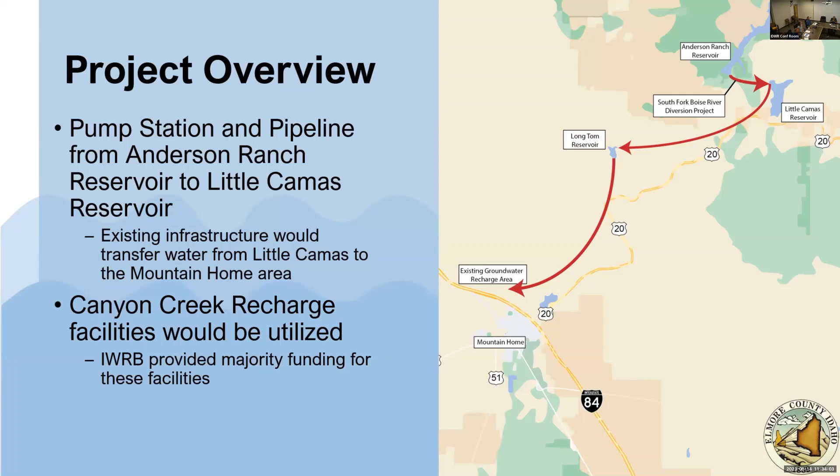Some specifics on the current project out of Anderson: it's about almost 14,000 feet of pipe, 48-inch diameter currently proposed. Although we've got a permit for 200 CFS, we've scaled back the project to 50 to 70 CFS, and that's what that 48-inch pipe would convey. That's more suited for the existing capacity of the Mountain Home Irrigation District Canal, and it contemplates that we'll be able to get storage out of Anderson so that we can run more than just flood water. The pump station would have 5 to 7 pumps, 1,500 horsepower, 4,500 gallons per minute each.

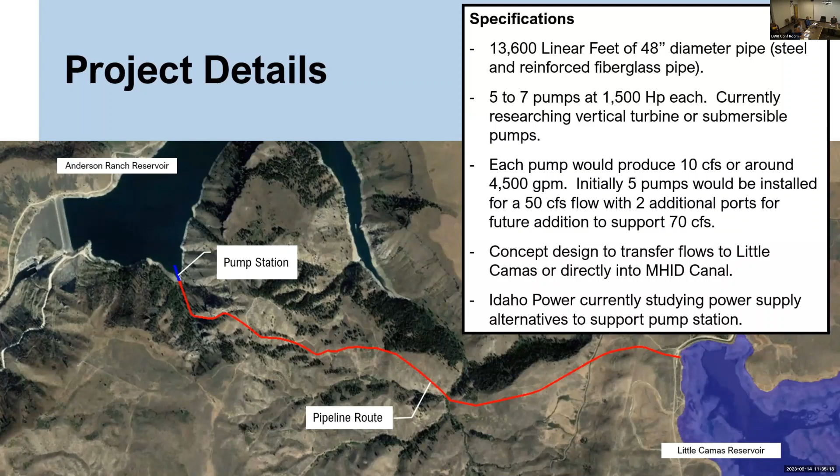We're currently studying power supply alternatives to support the pump station, along with other preliminary engineering that's ongoing. With that, I'm going to turn it over to Carrie Hill. She's going to talk about what's going on right now and into the near future.

Thank you, Madam Chair and Board. Carrie Hill with Panorama Environmental.

HDR is working on a preliminary engineering report style document that we received an Idaho DEQ wastewater planning grant for this last fiscal year. Aquifer recharge falls under the wastewater rules, so we've appreciated that. That's really going to support the pumping alternatives and look at the specifics of inline pumps versus potentially a platform setup. Power alternatives will also be included, including Idaho Power and Bonneville Power Administration coordination, as well as access roads, staging areas, and it'll provide us a more detailed cost estimate for alternatives specific to pumping to consider.

We've also initiated the preliminary environmental work with NEPA fieldwork and studies getting going. The Forest Service would be the lead federal agency. We do anticipate an environmental impact statement with this one. They have been very cooperative, encouraging of the project, and actually waived any cost recovery fees for us, so they're very supportive so far. We will do a wetland delineation, biological surveys for botany this summer, and then cultural this fall, so we'll be ready to roll into officially kicking off NEPA in 2024.

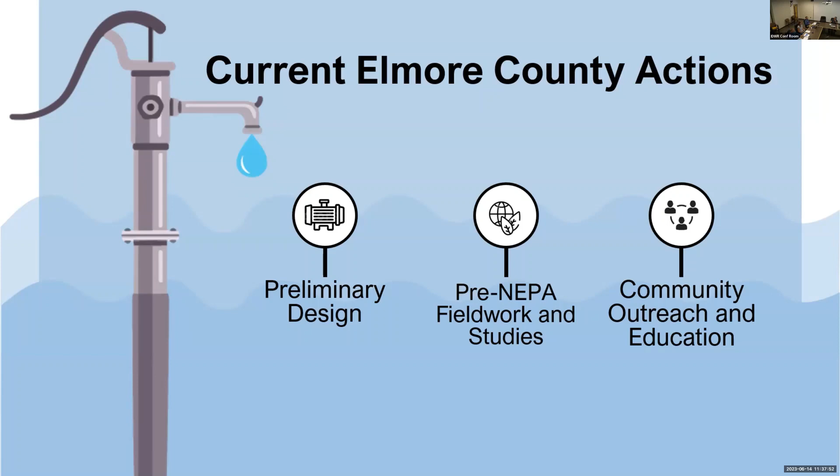Let's go to the next slide please. We'll talk a little bit about estimated costs and funding. Terry mentioned that we had scaled back the project. We had it up in that $50 million preliminary range, and 30 to 40 is a little bit easier to swallow, but we are looking at that $30 to $40 million range. The alternatives report will narrow that down for us, of course.

That's for the capital costs. The funding sources for this type of project are challenging. We are going to be looking at a local, state, federal conglomerate. For state alternate options, we were looking at potentially using IDWR, IDEQ. They've said that they would like to fund more for recharge, but competing for the existing money is challenging. So we have been working with DEQ, and they're advocating at the state level to try to recognize that for recharge, there's a state, across the state, multiple projects that could benefit from a new pool of money or something that would make us a little more competitive and not compete against also important drinking water and wastewater projects. At the federal level, we've had preliminary conversations, just at a high level, because we don't have our detailed alternatives yet.

But just probing what might be out there in existing pools of money, we've talked to Reclamation, we've talked to EPA and looking at the WIFIA program, and then USDA Rural Development as well. But of course, we are open to others, NRCS potentially, and we'll talk to anybody.

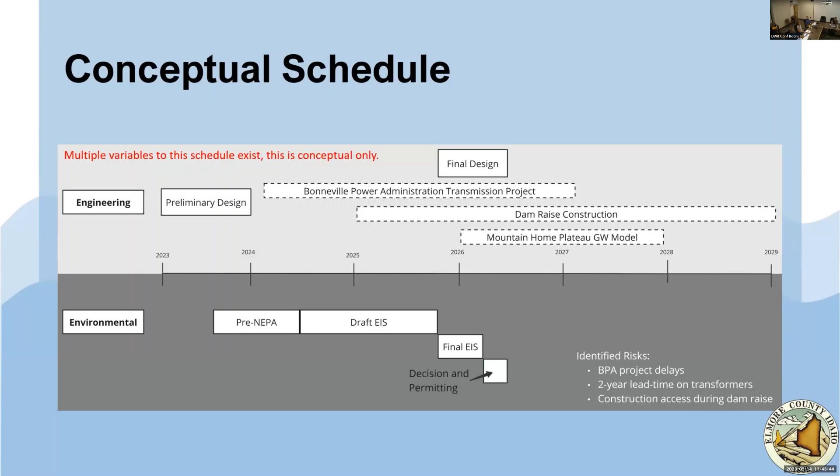So our immediate next steps, obviously this year, completing that preliminary engineering. We'll continue our public education and stakeholder engagement, and then formalize a project description for use for NEPA initiation. That would give us something to take to the public and start the formal NEPA public scoping.

Then in 2024, we do intend to submit a grant application for this upcoming aging infrastructure grant rotation for a seepage study on 13 miles of the canal. We recognize the canal is 100+ years old and there are problems, and we can't just spend tens of millions of dollars up top getting the water there and ignore the canal condition. So there are future projects there as well, including the tunnels we mentioned, which we are considering.

We'll formally initiate NEPA next year with the notice of intent, and then pursue additional water procurement. Like we mentioned, the county does still intend to pursue the dam raise water as well as rental pool water to supplement and make it a more feasible long-term project for residents. Also develop the financial and managerial capacity, looking at really forming the district and what would be needed there.